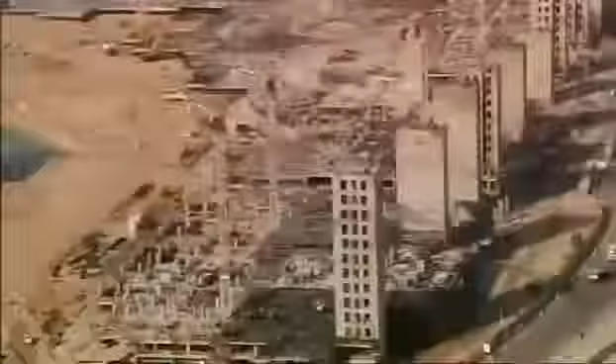Abu Dhabi is in the midst of a construction boom. It's the largest of 7 sheikhdoms known as the United Arab Emirates. Its capital, also called Abu Dhabi, is the richest city on earth. Its ruler, Sheikh Khalifa, has a cool $875 billion in the bank and an audacious spending strategy to match. He wants to transform the skyline and compete with the international elite of London, New York, and Hong Kong.

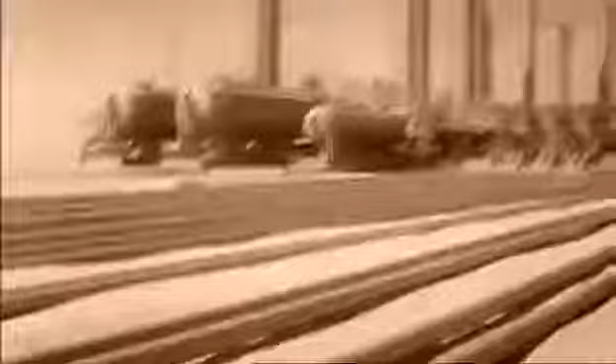But this is not the first time the Emirate has stood at the crossroads. Just decades ago, Abu Dhabi was a desert backwater, until the discovery of oil in 1958 brought unimaginable riches to its ruler, Sheikh Zayed. As the petrodollars flowed in, he converted the shell houses into high-rise, and the traditional way of life was swept away.

Today, Abu Dhabi is a thriving metropolis sitting atop the world's 5th largest oil reserve. But black gold alone cannot put this city in the Super League. To do that, Sheikh Khalifa must lure big business and tourist dollars. Abu Dhabi must expand to thrive.

To put Abu Dhabi on the world map, fledgling property developers Aldar plan a whole new micro-city, Al Raha Beach. It's an ambitious proposal. At 11 kilometers long and almost a kilometer wide, this city on the sea will be the biggest project ever attempted in Abu Dhabi's history. Mohammed Al Mubarak is in charge of delivering this audacious development. The vision of their highnesses and the vision of Aldar was to create this almost mini city where people can live, study, play, and work in one destination.

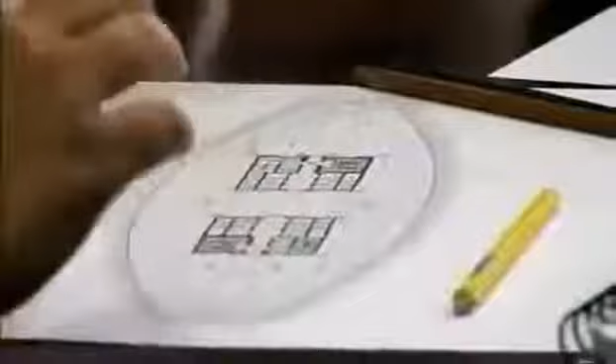Al Mubarak must attract investors if Al Raha Beach is to succeed. So to launch the project, he commissions a signature skyscraper. Creating an iconic structure on Al Raha Beach was of vast importance in basically putting Al Raha Beach on the world map. Al Mubarak sets Lebanese architect Marwan Zgheib the task of designing an icon that raises the stakes even higher. The building will become Aldar's headquarters in the heart of their colossal development.

But creating something new in a land where the iconic is the everyday won't be easy. Neighboring Emirate Dubai has taken center stage with a number of headline-hitting projects. The world's tallest skyscraper, Burj Khalifa, the Palm, and the World, and the emblematic Burj Al Arab. To stand out from the crowd, Zgheib knows he must redefine the extraordinary. Simple can be powerful sometimes, especially in architecture. You can see it since the pyramids of Egypt. Most of the iconic buildings are very simple buildings.

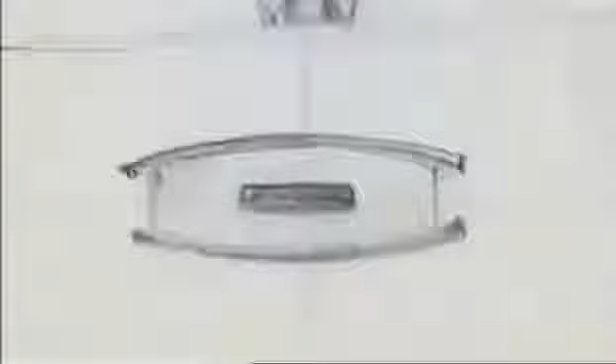But it isn't until Zgheib is relaxing on a plane that he has a brainwave. I couldn't sleep, so it was a moment of relaxation, you know. And then the idea came simply. So I took a pen and I drew it on a sketchbook. The design is simple but daring. A round skyscraper taller than the Statue of Liberty, with a curved glass skin covering the area of 4 football fields. To be honest with you, the moment I imagined it, I knew it was a winning concept. I knew it was something different.

In fact, the design is so unusual, Al Mubarak initially doesn't know how to react. When I first looked at the MZ design, I was a bit confused in the beginning, to be honest with you. I felt like I was looking at a comic. I felt that this was a flying saucer and basically it landed on Al Raha Beach. And I just kept on staring at it for like another 15 minutes. And after 15 minutes, I just fell in love with it.

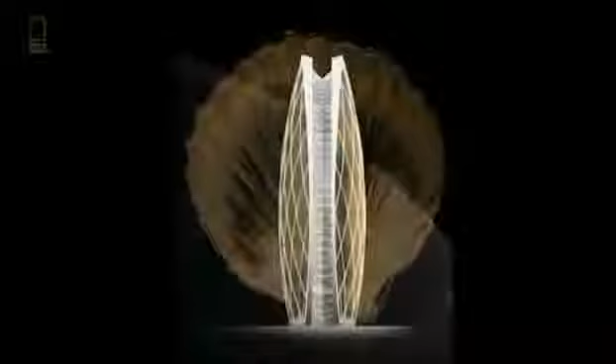Zgheib's design is inspired by nature. 2 giant circular curved walls of glass mirror an open clamshell. Architecture is nothing but imitation of nature. At the beginning, the idea was so geometrical, very pure. It's like a seashell. The seashell has deep meaning for Abu Dhabi with its seafaring heritage.

But a circular design poses a problem. Just like a coin that stands on its edge, it risks being unstable. The circle must be balanced. So Zgheib turns to some very old-school geometry. The real challenge of the circular facade was to find the 2 points where the building should pose on the ground. And for that, I had to go back to one of the oldest rules in architecture, proportion. When you have a circle, you can divide it into a pentagram.

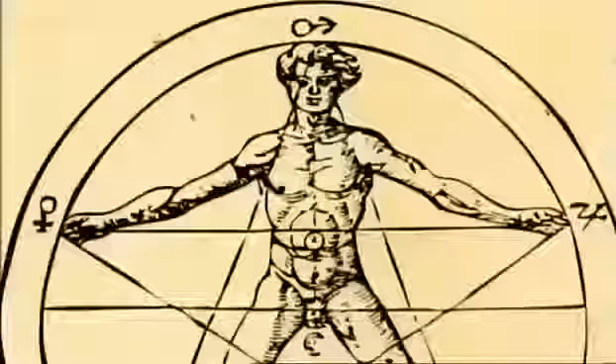And that pentagram, in fact, is a representation of the cosmic body of the human being. So you can put a man in that pentagram, the man and the universe. So the pentagram will define the 2 points of the circle where the facade will lay on the ground. And this will create the perfect balance. It was the same thinking that led 16th century philosopher Heinrich Agrippa to draw man as a pentagram inside a circle, and has helped architects to proportion buildings for centuries.

But it's not the skyscraper itself that poses the first major challenge. It's the proposed site. They wanted to show me the site, but all you can see was the sea, nothing but the waters. Unbelievably, the solid ground required for Aldar HQ does not yet exist. The desired location is 700 meters out in the Persian Gulf and 8 meters underwater.

New land must be created. Over 3 million cubic meters of sand must be found. Surely a simple task with Abu Dhabi's endless desert dunes. But desert sands are too fine to build with. The land would just slide into the sea. Marine sand is needed. Its larger grains help it stick together, creating the perfect base to build on.

Dredging sand from the seabed is one solution, but fortunately, the last sheikh has already done the job for them. Whilst cutting a shipping channel in the late 1970s, Sheikh Zayed created an island of discarded sand. Luckily for the engineers, it's just across the water, so they decide to move all 20 million cubic meters of it. A fleet of cutter dredgers eat their way into the island.

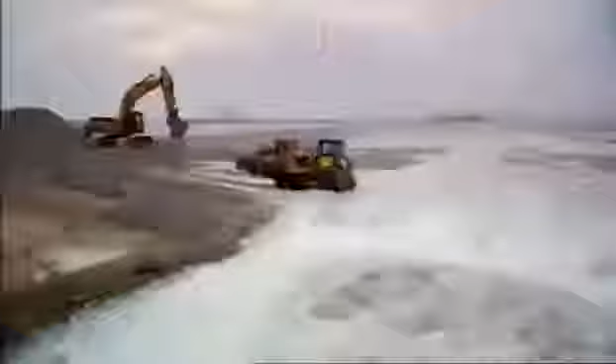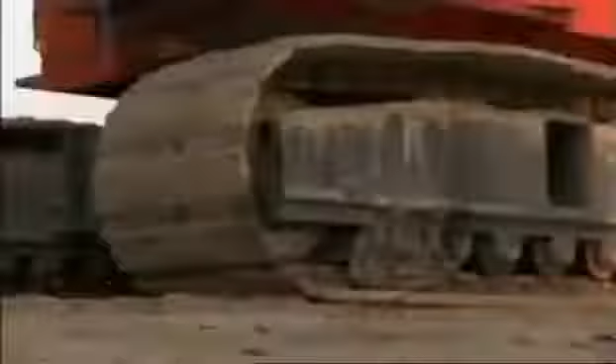These are no ordinary dredgers. It takes an enormous claw layered with 48 reinforced steel teeth to slice through the hardened sand. The sand is pumped through a floating pipe to the construction site. Here, excavators toil 24 hours a day to flatten the virgin ground. After 8 months, the land for Aldar HQ is fully formed, and with this, the first major problem overcome.

Now, engineers must somehow turn Marwan Zgheib's radical design into an engineering blueprint. But it soon dawns on the engineering team that time isn't on their side. We mapped out the program and I realized that basically from this blank sheet of paper we would have to start piling within 2 months, which is absolutely unprecedented for any building, but certainly a building which is of a unique geometry.

Aldar want their skyscraper completed by an astonishing deadline. In just 30 months' time, the eyes of the world will be on Abu Dhabi when it hosts its first Formula One Grand Prix. The racetrack will be on its own designated island, complete with hotels and theme parks. And Aldar are building the lot. The international press and tens of thousands of visitors will descend on the city. It's the ideal opportunity for Aldar to showcase their new HQ. But to stand any chance of meeting this target, the team will have to pull out all the stops.

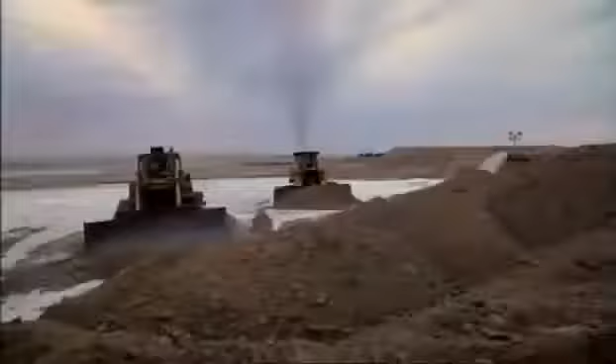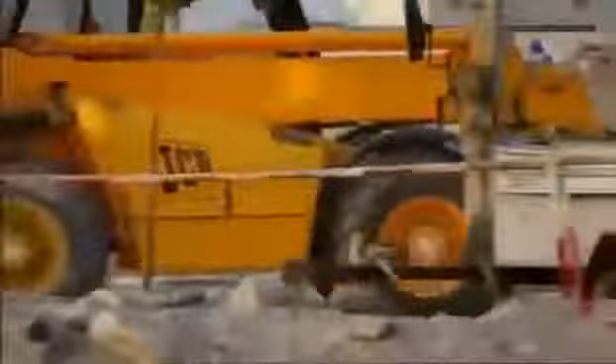Just 1 month after design has started on Abu Dhabi's round skyscraper, the construction team arrive on site to begin foundation works. For construction manager Miles O'Sullivan, the schedule is a shock. With the design not complete and being told you're going to pile in 1 month, almost crazy. But it's not just the first deadline O'Sullivan has to worry about. Aldar HQ's round curved shape presents an enormous sail-like area when wind strikes. Wind tunnel tests must be done to prove the foundations can take the strain. But the results won't be back until work has already started.

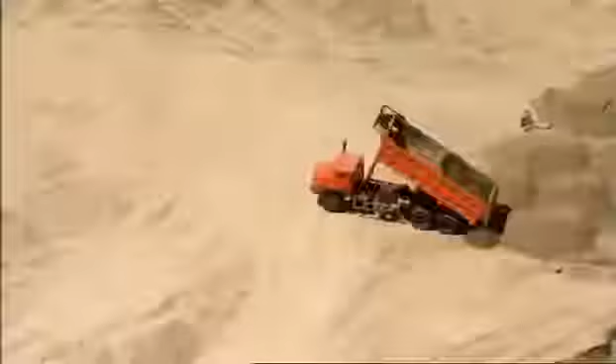Abu Dhabi is regularly hit by high-pressure winds that sweep in from the Persian Gulf. But building Aldar HQ so close to the sea will put the foundations under another kind of pressure. Digging for Aldar HQ is very similar to digging here in the sand. As you dig down you'll get to see the groundwater starting to surge through the sand. And in fact, it's that groundwater coming through the sand that's creating the pressure and creating the issues for us when we do the construction. The upward pressure of the water and the loose sand pose a problem for foundation construction.

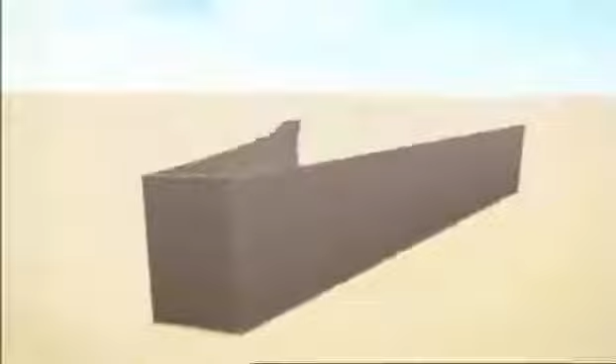Before excavation can begin, the team must build a solid barrier called a diaphragm wall or D-wall. It's a concrete barricade formed of interlocking panels which socket into the bedrock and reach 16 meters below the surface. The D-wall holds back the loose sand and the surging seawater, ensuring the ground inside the barrier can be removed. These areas here, what are these? The D-wall must be built before the foundations can be laid. But with the blueprint above ground a work in progress, the team can only hope that over-engineering the foundations will make them strong enough.

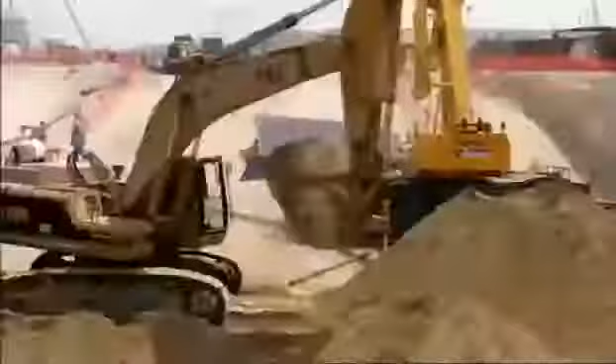The design calls for about 400 concrete piles that work in 2 ways. Half of the piles rely on friction with the ground to secure the structure to the rock and sand below, whilst the remaining piles drive deeper into the rock to dissipate the building's immense loads into the ground. On site, D-wall construction begins. It's the same process ongoing at this Abu Dhabi construction site.

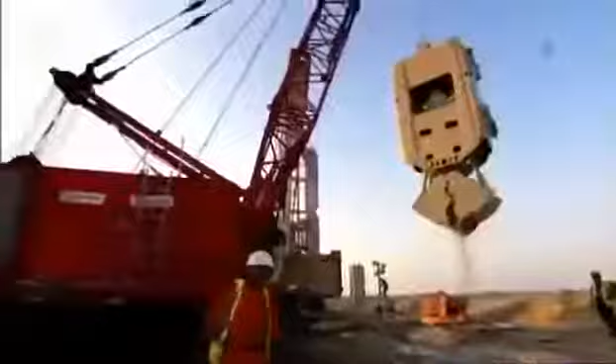Until recently, Al Raha Beach was just a vision for Aldar's Mohammed Al Mubarak, but the dream is slowly emerging from the sea. Seeing that land come up, seeing the amount of work and the amount of staff we had on the ground to make sure that was going to be done, that was like watching Rome being built.

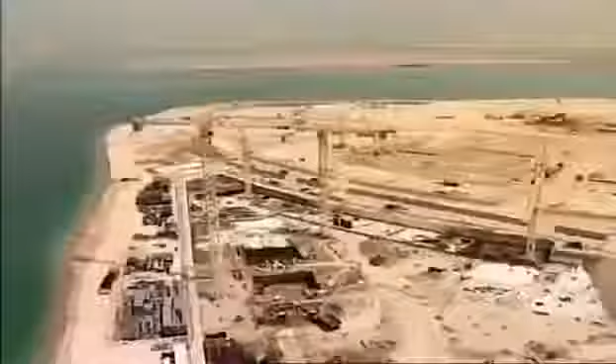The D-wall and concrete piles create a firm foundation upon which to build Aldar HQ. But the force of the sea pushing up through the sand still poses a threat to the skyscraper. A great way of demonstrating the problems we faced at Aldar HQ with the groundwater is in imagining that this bottle here is Aldar HQ. And as I push the bottle down, you'll see forces are exerted on my hand. And in fact, that's the groundwater trying to push the building out, trying to push Aldar HQ out of the building site.

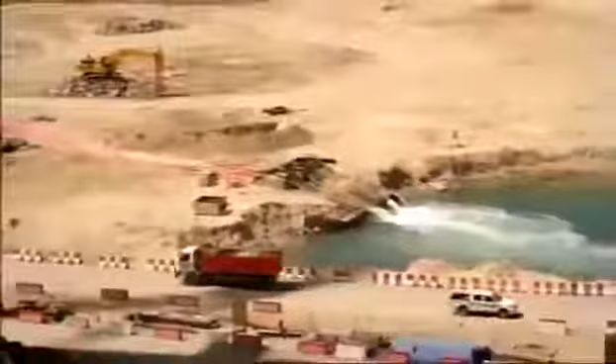To keep the site dry during construction, water is sucked out of the sand and pumped out to sea. But that's only a short-term solution. To protect this skyscraper in the long term, the team need an extra defense. It's a giant slab of concrete called a raft. It creates a barrier against surging water, stops the piles from punching up through the building, and acts like a snowshoe to evenly distribute Aldar HQ's 59,000-ton weight into the ground.

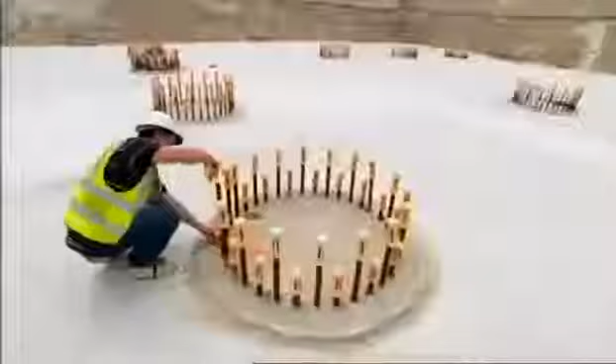Raft construction for Aldar HQ is 12,000 cubic metres of concrete, which is a 30,000-ton structure. It's a huge element. With 2,000 truckloads of concrete to pour, it's a job that continues into the night. But engineers are just getting to grips with the severe forces that will affect the piles. The unique shape of the skyscraper will capture wind like the sail of a yacht. There are no guarantees the foundations will be strong enough to cope with the loads.

The advanced construction works had to commence so quickly that we didn't have time to do the wind tunnel test. It was important that we did one, primarily because this is a unique shaped building. Gibbons calls upon wind engineer Roy Denoon in Colorado, USA. He puts a scale model of the HQ through its paces in his high-tech wind tunnel.

Right at the start, Craig Gibbons actually called me and said, "We've got something really unusual coming up. Can you take a look at it and give us your first best guess of what the wind loads might be? Give us some guidance on how to get to some loads for the foundations, because this is running on such a fast-track schedule." Knowing that Gibbons is already building the foundations, Denoon wastes no time in firing up the fans. If the tests reveal the wind loads are higher than predicted, the foundations already in the ground may have to be redesigned. To be putting in the foundations before we could finish the wind tunnel testing, that always gives us a little bit of cause for concern.

Denoon is right to be worried. He knows how high-altitude wind impacts on very tall rectangular skyscrapers. But Aldar HQ's lower height means another type of wind is the threat. When we look at the really extreme wind speeds in the Middle East and in this region, we find that the highest, what we call gust wind speeds, the short events, are caused by thunderstorms. Abu Dhabi may appear sun-soaked, but during the spring, the intense sun heats the moist air, causing spectacular thunderstorms. Wind speeds can escalate up to 137 kilometers per hour.

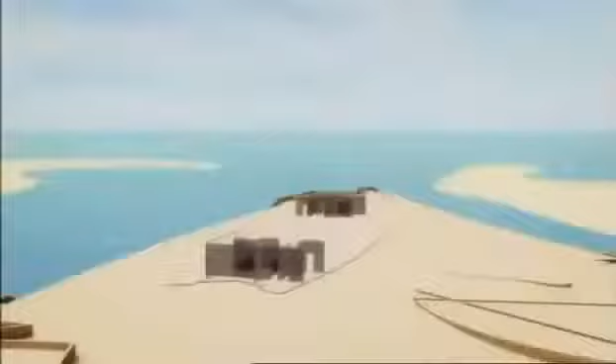Aldar HQ needs two concrete cores for extra stability. The twin spines rise a full 125 meters from the concrete slab to level 23. Reinforced with 6,500 tons of steel, these cores will transfer the loads into the piles. But to channel these forces safely, the concrete must be cast without any flaws.

They need a way to build the cores as two single pieces of concrete. The answer? To slip form. It's a clever way to build big concrete towers. Liquid concrete is poured into a giant mold, which forms the shape of the structure. The mold slowly climbs up the core as it's cast, forming a single concrete tower without any joins.

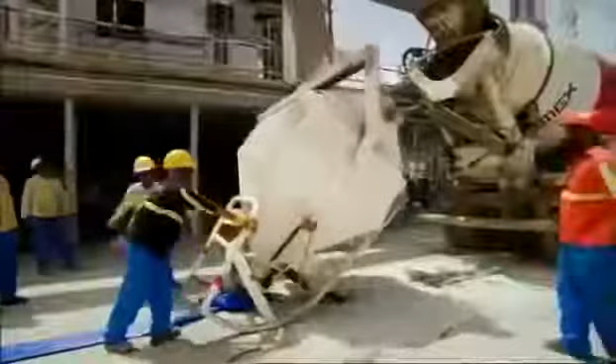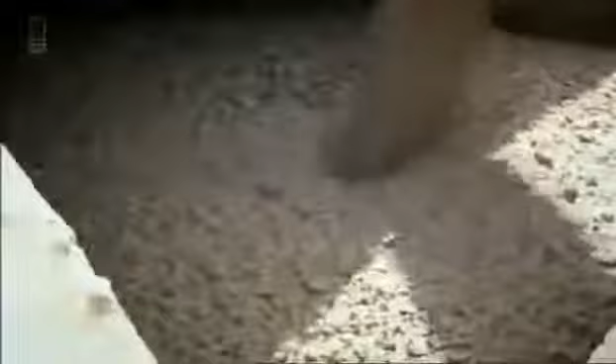Seamless concrete will ensure the HQ's cores are strong. But these 125-meter backbones must be built in only 6 months. It's the same process ongoing at this Dubai construction site, led by the Aldar HQ team. We are calculating how much per hour we need to climb, and then how much concrete we need to place in every hour. Slip form is fast, but on this schedule it's not fast enough.

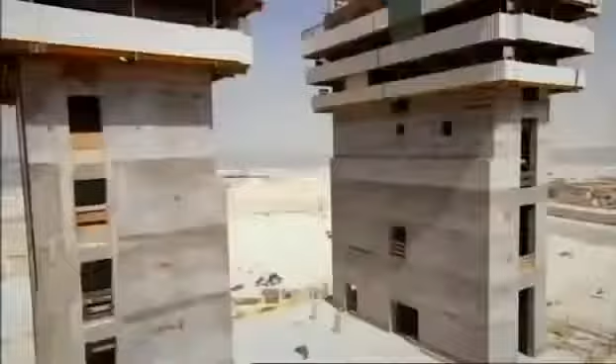O'Sullivan has a trick up his sleeve to speed up construction. We set a challenge to both cores, who could get up there first. More. Get up. The teams battle to reach each level before the other. The cores grow meter by meter under a constant cycle. The concrete is released and poured around the steel reinforcement. Hydraulics anchored to the structure raise the mold or shutter so that the next layer of concrete can be poured.

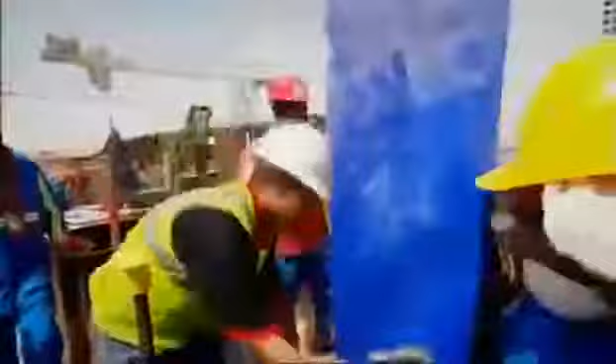Manpower is a key focus because slip forms are very labour intensive. You need to make sure that the guys are on deck, they're there at the right time, they're doing the right works. 4 months into core construction, the two teams are neck and neck in the race to the top. Core 1's team leader keeps a close eye on Core 2's height.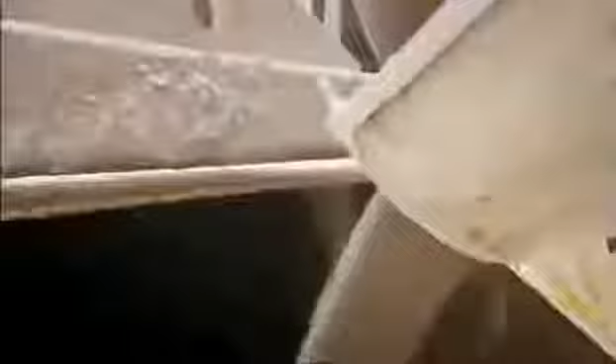It's been my benchmark, so if I'm doing better, I'll be ahead of them. There are a lot of pressures. My boss is telling me, do this, go up, go up, go up. But it's good, the pressure is good. Core 2's leader also feels the strain. I'm working 24 hours today. I try to finish earlier than the other core. Every month, the builders pour enough concrete to fill 1.5 Olympic swimming pools.

But the teams aren't home and dry yet. There's still a challenge to finishing. Cores are renowned for going up quickly and sometimes having problems, so there's a lot of coordination effort that goes in to make sure that they do go up on time. We had structural steel elements to cast in. We had crane connections to get right.

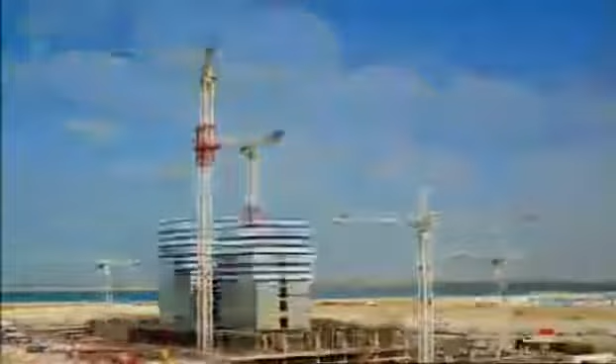After just 6 months, the two cores are approaching the top. Core 2 is only a meter or so behind, but Core 1 push ahead to victory. Core 1 won the race. It's really good to know that we're on top. For O'Sullivan, the contest to build the cores in record time has paid off. A lot of planning goes into the cores. To see it come off, a fantastic feeling. But it's only a stepping stone, the core construction. There's a lot more to go on.

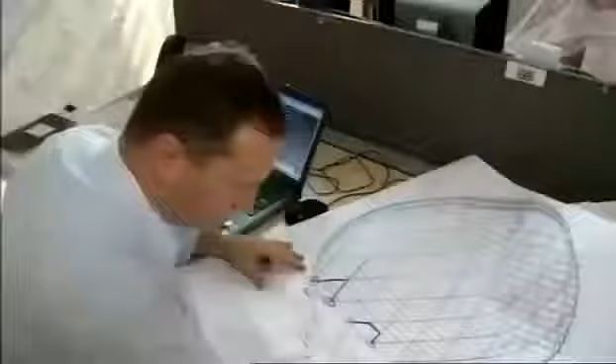The team have so far overcome the obstacles to bring Aldar HQ to life. But now they must face their most complex challenge to date. 1 year in, and Abu Dhabi's radical skyscraper is beginning to take shape. But with only 19 months to the deadline, the engineers must crack how to build Aldar HQ's vast external shell.

The design demands a heavyweight shell to support its wide girth and survive huge wind loads. But the architect stipulates open office space, floor-to-ceiling windows, and panoramic views of the Persian Gulf. In the United Arab Emirates, the shells of rectangular skyscrapers are built with concrete.

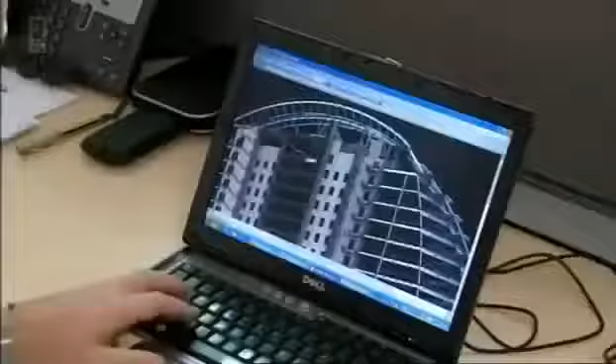But the geometry of Aldar HQ's shell is so complex, it must be built with the precision of a Swiss watch to fit together. On this scale, achieving millimeter accuracy with concrete is practically impossible. We knew at the outset a wholly concrete building was never going to work in this instance. And Stuart, I understand that now we've been able to get a high degree of repetition through. And there we go. The engineers need another solution.

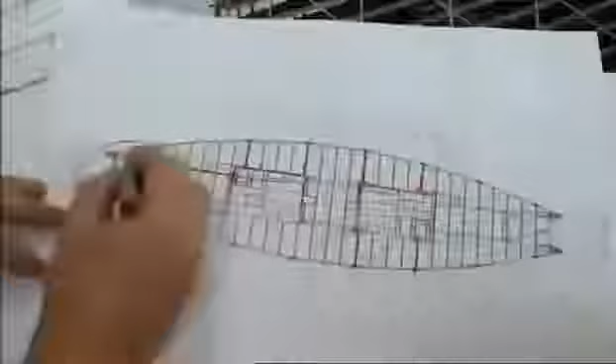The steel exoskeleton should make the architect's vision possible, but it'll be a first for the United Arab Emirates. Constructing a skyscraper like this will be a step into the unknown. The geometry of the building presented a significant challenge to us, but the other challenge was that a diagrid building, or buildings using this diagrid system, had never been built before in Abu Dhabi and the UAE. Let's have a look at it if you don't mind.

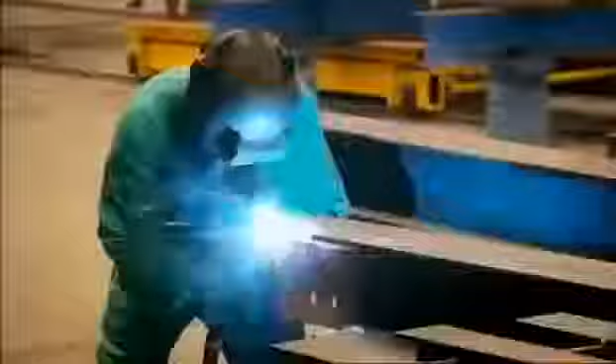It'll take expert steel fabricators to pull this job off. When we first saw the design, it was something that we knew we had to put our most experienced guys on. The structure's very, very complex. The army of fabricators work in shifts around the clock to cut and weld 2,500 tons of steel. The factory is building a series of A-shaped steel sections, weighing up to 30 tons each. They will connect together to form the structure's signature curves.

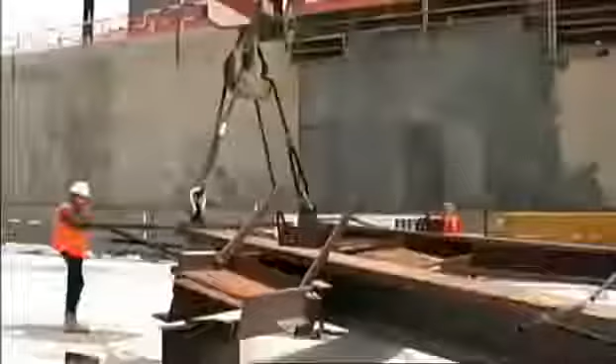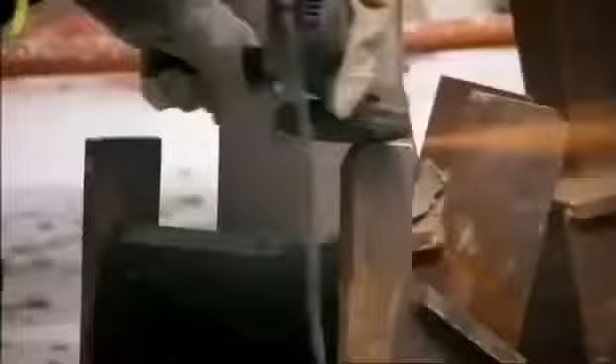But if manufacturing these giant A-frames is not a big enough job, lifting them into position on site will be a major challenge. Great to see the steel arrive for the main diagrids, the main columns to the structure. Huge sections. The thought of actually starting the steelwork some 18 months after we started the job, fantastic. But excitement of the first A-frame delivery is soon replaced with trepidation. Lifting these monsters will be a precision job, and tensions run high.

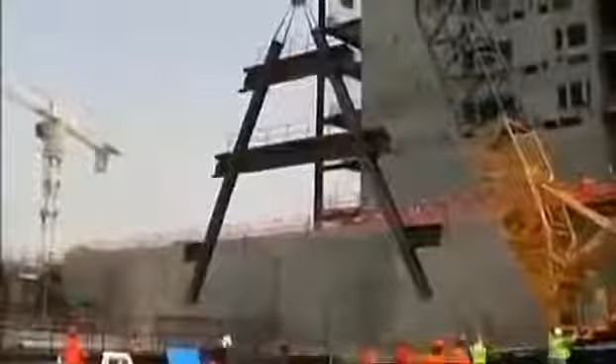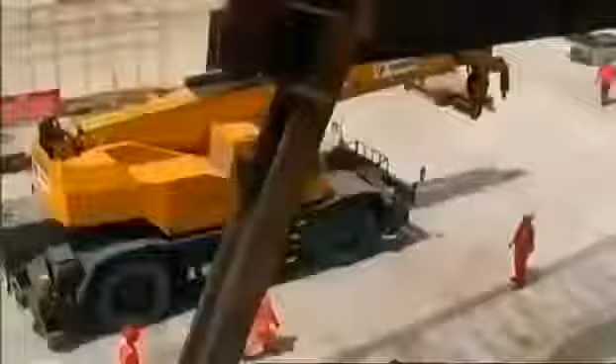When we rigged the first A-frame up, you've got to put all the chains on it. It would take maybe an hour to rig it up, and everybody's then thinking, I hope this is going to work. Everyone is on tenterhooks. Now is the moment of truth. The A-frame is lifted off the ground. There was a big ah from the crowd when it went in. The first exoskeleton section is finally bolted to the base plate. To see one go in, an amazing feeling. First A-frame up, again a milestone achieved, but then a lot more to go.

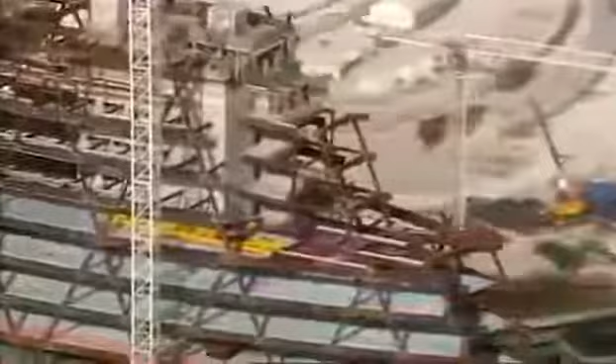Another 99 A-frames must be fitted to form Abu Dhabi's unique skyscraper. The handover date is now just 19 months away. So the team must now focus on the HQ's interior. The structure needs an alarming number of restrooms, 85 in total. This is no weekend DIY job. It'd take an army of plumbers and time the schedule cannot spare. So to fast-track the task, the team innovate again with prefabricated washroom modules, or pods.

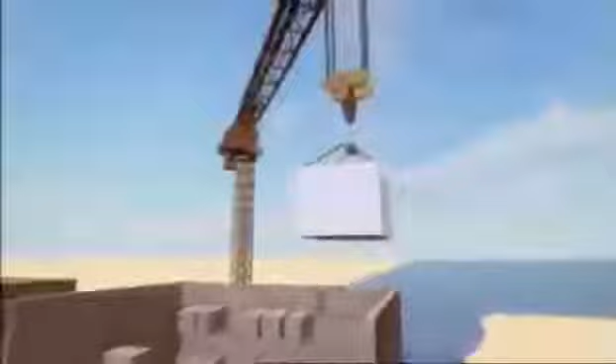A pod is a factory-made restroom, complete with lavatories, basins and mirrors, ready to plug into the building. The team plan to lift these 12-ton pods by crane and lower them into the cores like a giant game of Tetris. Construction is a finely tuned sequence. The pods have to be in before the exoskeleton blocks access to the cores.

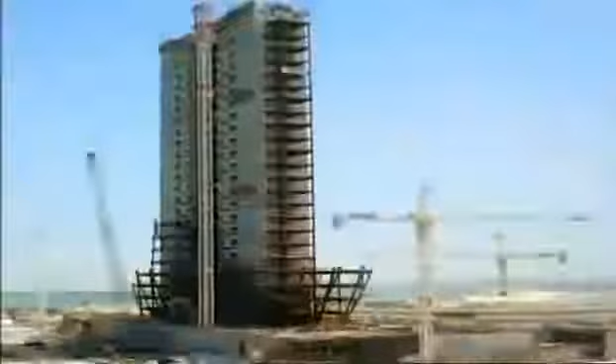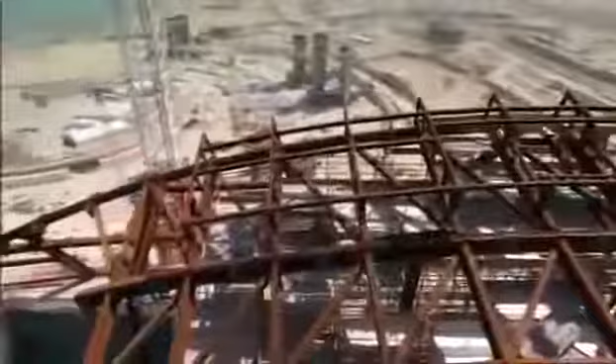Aldar must approve the design fast, but there's a problem. We produced a lot of visuals and graphics which we had signed off. Then we actually built the pod. We went to look at it at the factory and a lot of people thought that's it. But Aldar unexpectedly rejects the pod design. It's just too ordinary for such a futuristic skyscraper. It will take months to remodel, and the exoskeleton can't wait. The whole plan could go down the pan. The only option is to leave out 2 roof sections and drop in the pods later, but this has its own dangers.

With zero hour looming, the team must now wrap the building's skeleton with a glass skin. And no one has ever built a glass facade like it. The geometry of Aldar HQ is highly complex. 2 giant bowed facades cover an area the size of 52 basketball courts. A third narrow surface joins the round facades like a zipper, arcing an extreme 290 degrees from one side to the other. But curved glass like this doesn't exist. The engineers need another plan.

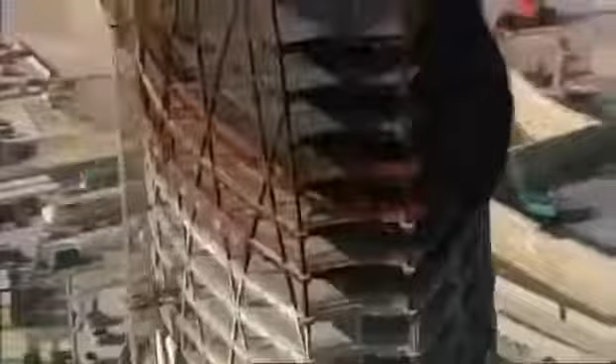The secret to covering a curved surface with flat glass is its shape. Square glass isn't an option. Squares can only bend in one direction at a time without distorting. Aldar HQ needs triangles. They can pivot on 3 axes and seamlessly join with their neighbors. To form these complex curves, it'll take 25,000 individual panes.

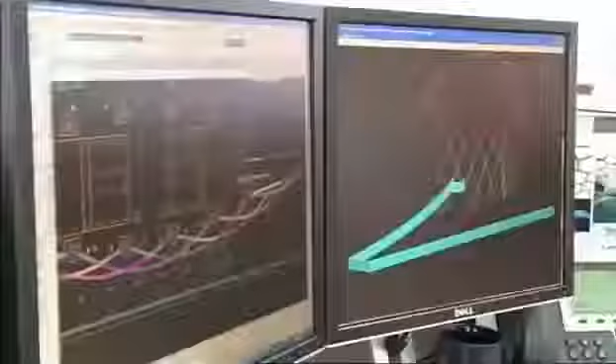But before glass production can begin, the team must know what wind pressures it will face. It's back to wind engineer Roy Denoon, who must test the design in his wind tunnel. When we first saw the design, we knew there was some potential for some quite high glass design pressures. If you under-design a pane of glass, then it will be sucked out the building. The large facades are most likely to cause trouble.

The biggest loads on the overall building are the winds coming flat into the wide face, so it's capturing it almost like a sail. The wind comes into the centre and spreads out around the building, and where it separates and splits away from the building around the edges, that's where we see the largest pressures. The pressure is like a big SUV hanging off the outside of each panel.

But that's not all Denoon's test reveals. The circular shape of Aldar HQ creates another problem. When we initially saw the design, the sharp edges threw up this warning flag that said, look, we can get some pretty large pressures here. Where the wind hits the edge of the narrow strip of glass, it spirals in on itself, creating a vortex.

You see this recirculation of the flow. It separates away and you get this little bubble on the surface where the wind isn't hitting, and then it comes back in to meet the surface again. That's typically an indication that that's where your highest design loads are occurring for your glass. And that's very, very strong suction force is what that little bubble means. To stop wind sucking glass out of the HQ, each pane must be beefed up with thicker glass and a stronger frame.

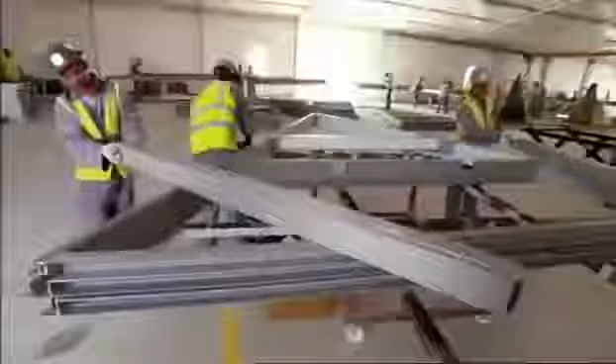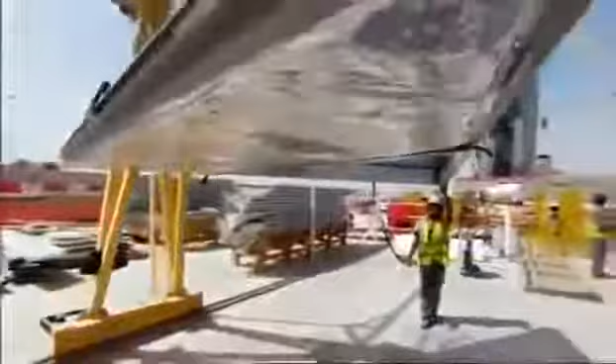But that does nothing to limit the scale of the job ahead: installation. You talk about 25,000 pieces of glass to do that for the building in 10 months. It's a monumental effort. It's a constant battle, making sure that you get the glass to site. But having the glass factory on site is a lifesaver. It made it easier for the site to actually call up on glass. Once they were installing the panel and ran out of glass, we're immediately on the phone, hey, we need more panels over there. So we got them on a truck, and 5–10 minutes later they were on the site.

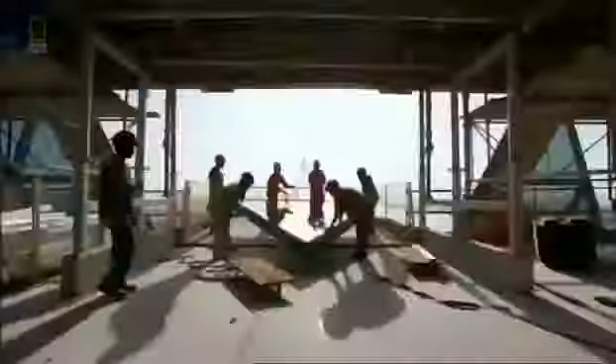The glass factory sends the panels to the site by truck, and the panels are lifted by crane up to the installation team. The constant pressure was the program. The glass is pulled onto the floor plate, but it takes a team of 8 specialist riggers to install the panels. Probably the hardest thing was the sheer volume that had to be installed. Fixing glass on a curve at this height means the panels have to be swung out from a platform that hangs out of the building.

It should be easy, but then this team have Abu Dhabi's wind to contend with. The wind here can just blow in from nowhere. It caused us no end of problems. The glass would start to revolve and spin. We would get a choice whether to lift it, bring it into the building, put it down, or to put it straight back down on the ground. They were decisions that had to be made on the spot. And you don't want a large panel coming down from 20 stories. Just contemplating that, it doesn't bear thinking about.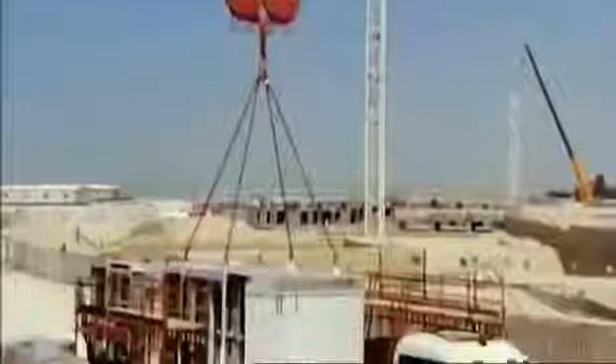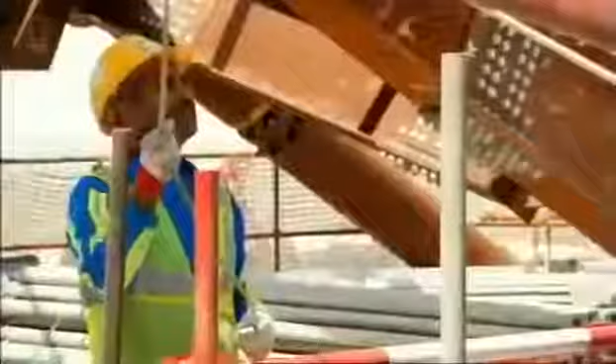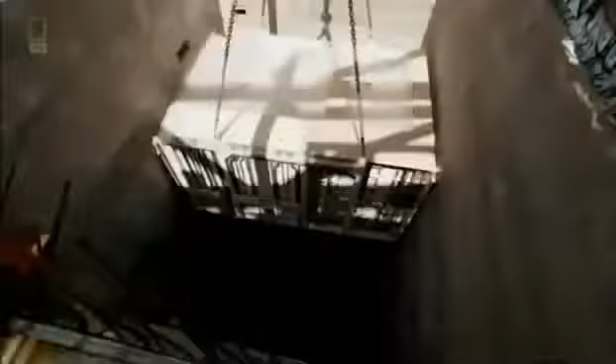The new design is finally approved, and after 10 months, the 12-ton modules start to turn up on site. The pod drops are quite quick. We hook them up, we take them up the 140 metres to the top of the tower crane. The pod can now be lowered into the core shaft. It's a tight fit with just 75 millimeters of clearance. When I saw the first pods in, it was a relief that that saga was over and we'd actually managed to achieve what the client wants.

The pods are on the move, but the long delay has serious consequences. Finishing the exoskeleton should be a straightforward task. But the incomplete steel roof has sagged out of shape.

Eight months from the deadline, and the world's first spherical skyscraper is fast approaching completion. But with the end in sight, construction hits a serious snag. The delay in fitting the washrooms into the cores has forced the team to leave the roof arch open, causing the steel to slouch out of shape.

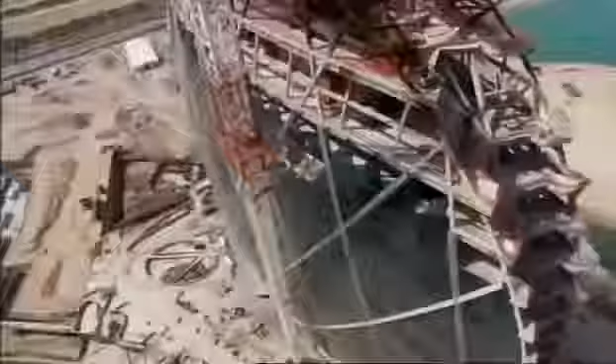The arch of the HQ's lightweight roof is the key to its strength. Its curves evenly distribute the forces down into the foundations. But if any elements of the arch are missing, the forces cannot flow away. The roof will sag under the weight. To discover how serious the slump is, the steel is surveyed.

I've made a phone call to our site supervisor, Bob, and asked the question of what the actual sag was recorded, expecting it to be around about 50, 60 mil. When we got the figures of 150 millimetres, I was a little bit shocked.

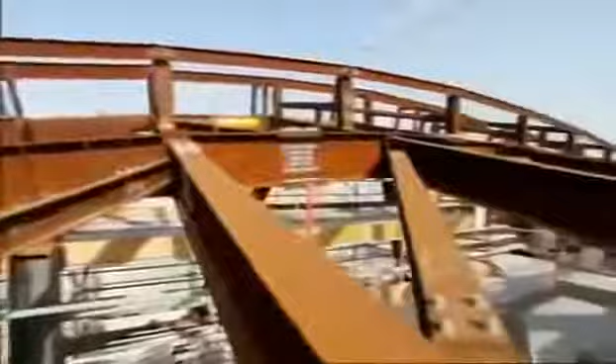With a building that relies on precision engineering, a 150mm sag is a huge problem. The roof will not slot together. The brackets to connect the remaining 40 glass panels will be out of alignment. There is no time to redesign. The team have to somehow make the roof steel fit together. The only way is to lift the entire roof into position, and it weighs a staggering 200 tons.

Even for experienced steel engineer Bob McPhee, this is a serious undertaking. I hate it when you start waking up thinking about your work. I've never liked to do that.

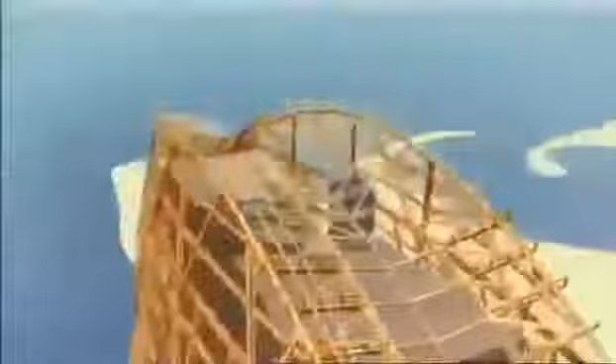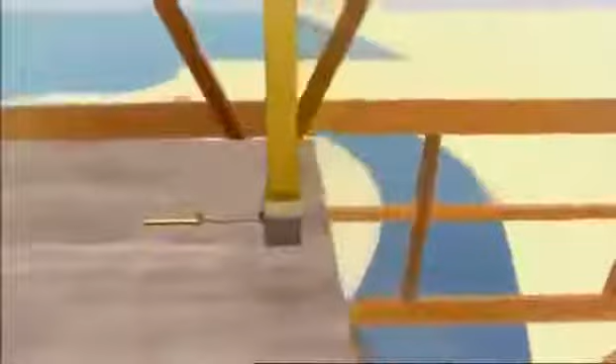To lift the roof arch, 2 hydraulic jacks are positioned on top of a load-bearing wall, carrying 80 tons of weight into the core. 2 more jacks are propped with 16-meter-tall steel columns and channel 40 tons each into the concrete floor of level 23. The props are packed with steel slabs to hold the roof in position as the jacks are raised.

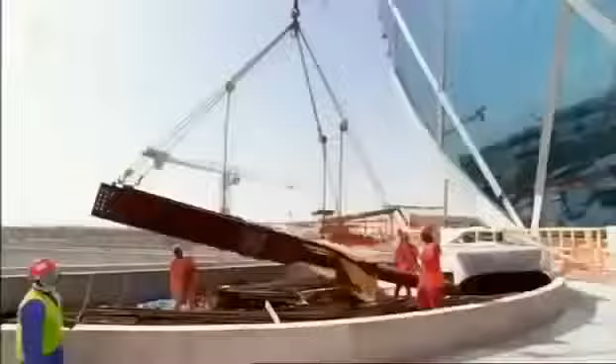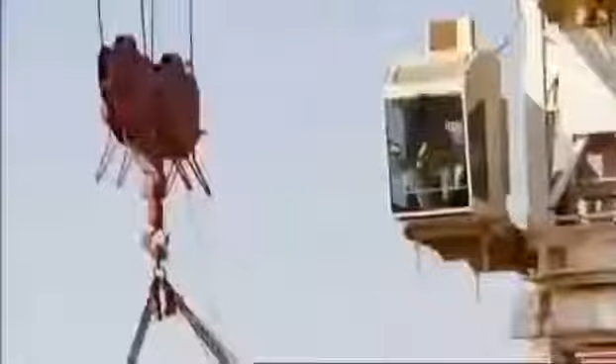The roof was moving firstly a couple of millimeters, then 5, then 10, then gradually into its position 20, 50, 100, and then into its final position 150 millimeters. The entire roof is raised by a whopping 150 millimeters. The slumped arch is finally in the right position. All that remains is to lift the last steel section. It's a tight fit. With a millimeter to spare, the roof is finally complete.

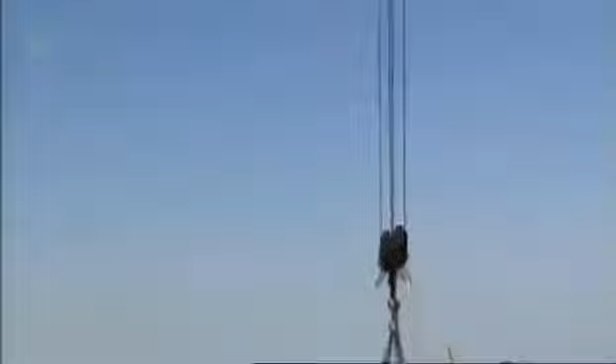With just weeks to spare before Abu Dhabi's first Formula One motor racing spectacle hits town, all of Aldar HQ's 25,000 glass triangles are in position, except one. The glass installation team lower the pane inch by inch. No one wants to be responsible for shattering the last sheet of glass. It's a defining moment for the team. Finally, the last pane slots into place.

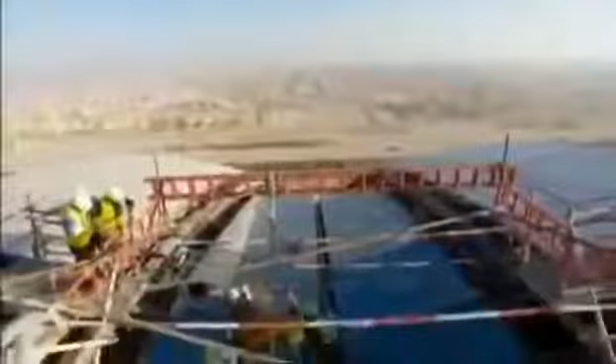Ecstatic. Actually see the last bit of glass go in. Amazing feeling. Hopefully the guys here feel the same way, and I'm just overjoyed. Against all the odds, and in just 30 months, the team have fulfilled their brief.

An engineering triumph. This is Aldar HQ. This spherical skyscraper, a world first, rises 110 meters above the Abu Dhabi sands. All 25,000 glass panels mirror the surrounding landscape, reflecting the blue skies and the rolling sea of the Persian Gulf.

Amazing structure. You don't see any circles in the world being constructed, so to be part of that was fantastic. Mindful of all the issues and challenges and highs and lows in between adds to that feeling of triumph. Mohammed Al-Mubarak fell in love with an extraordinary idea. But will the building match his high expectations?

It's really a work of art. It's a stunning building. To me, it feels like it should be in a museum. The space is unbelievable. It's really a colossal building. When you come up front to it, it's even bigger than you even imagined. And for it to come from paper to that, it's great.

Already an icon on the Abu Dhabi skyline, Aldar HQ should lay solid foundations for the future of Al Raha Beach. Architect Marwan Zgheib is delighted to see his concept sketch come to life. The building is more beautiful than the original idea because it's real now. It's no longer a simple concept.

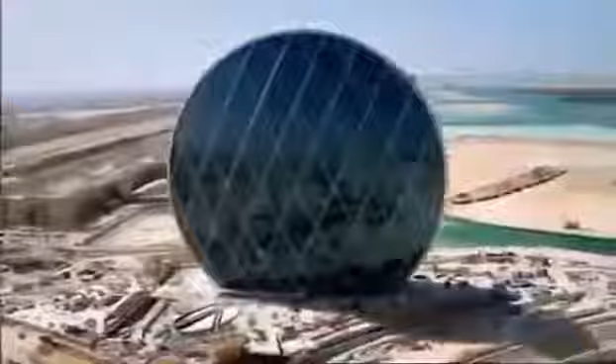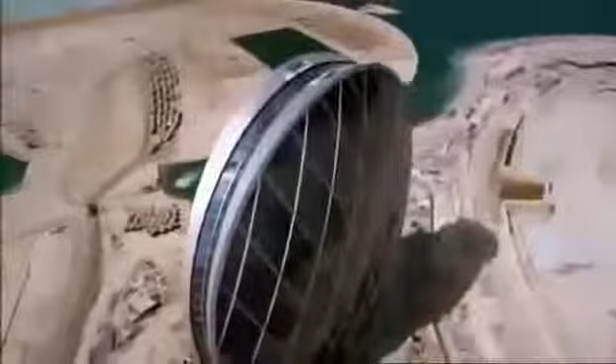It's become reality. Aldar HQ is a structure that rivals not just Dubai's iconic buildings, but can stand proud on the international stage. The HQ building has really put Abu Dhabi on the world map. If you ask me today, we're not yet into the world of Singapore or New York or Paris or London. Will we get there? I absolutely believe we will.